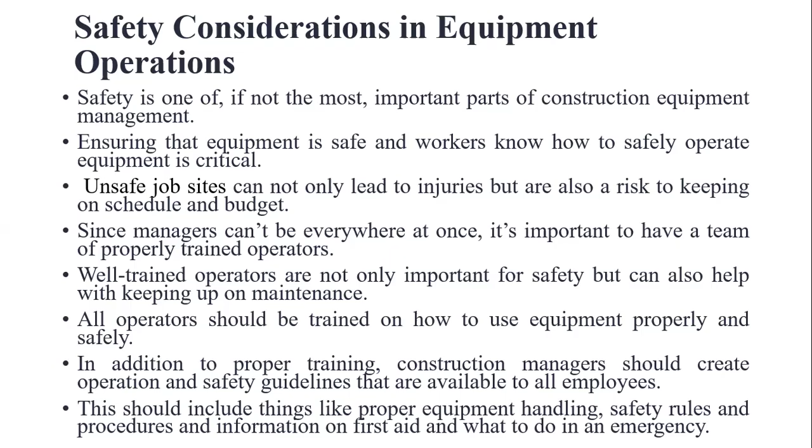So to avoid unwanted problems, it is essential to train the labor for a particular period of time. Nearly 20% of the workers in the construction sector are injured because of lack of proper knowledge, and these injuries are not reported to the higher level of management. Because if they give such explanation to the management, they'll decide that these people are not fit for the job, and for the next projects these people will not be called for, automatically leading to unemployability. So this is the reason why people do not report most of the accidents at the site to the higher or top level management.

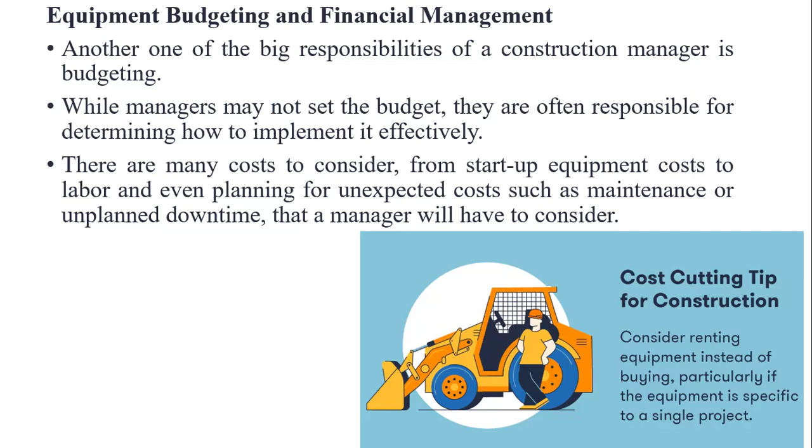Next comes equipment budgeting and financial management. Another important role of the project engineer is budgeting for machineries. They want low cost machines to do the operation so that the cost of construction will be in control. If the project engineer fails to do so, then he or she is not fit for the job and will be fired from the organization. So budgeting and financial management for equipment is quite important.

Next comes the types of cost involved in equipments. First one is acquisition cost. Most of the cost spent by the construction company is for buying machines so that the work will be automated with very low manpower. Based on the company of the machines, the cost will vary.

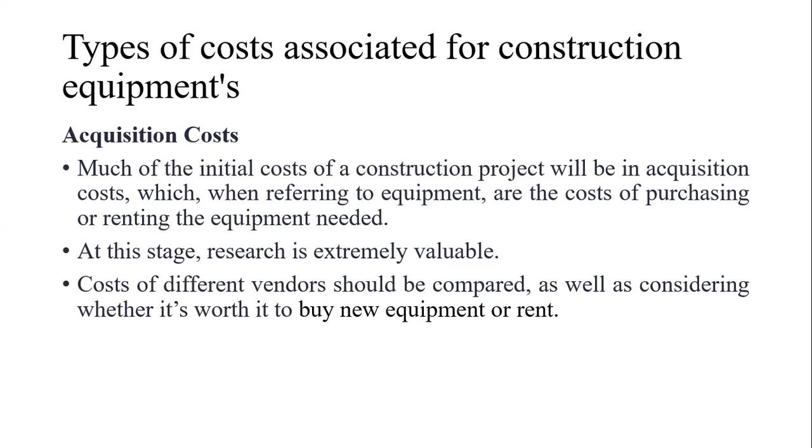There comes a difficult decision making situation - what type of machine has to be bought and from which company. So we have to compare the specifications of machines as well as the suppliers, and based on that, a decision has to be made. And next comes the operating cost.

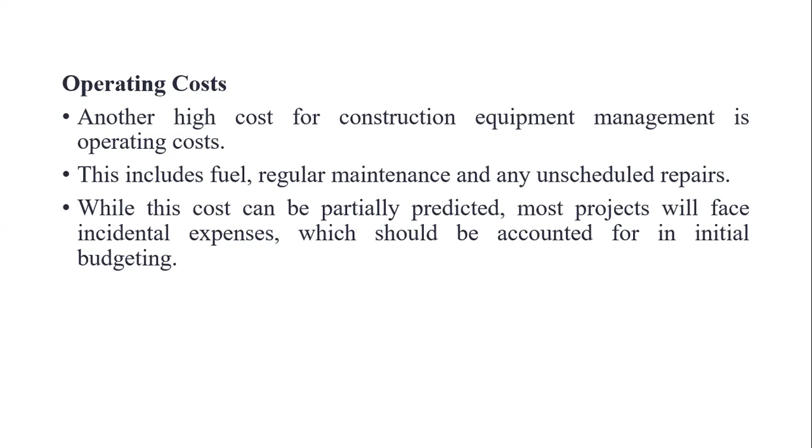Another important thing is operation cost. For example, for doing any activity, how much amount of money is involved, and how much amount of money is involved with other sources also, has to be compared. So based on the comparison, we may know how this machine is going to perform for the particular project, so that we can predict the cost for a particular activity for employing a particular machine.

Next comes depreciation. Depreciation represents, after a particular period of time - for example, after 10 to 15 years of buying any equipment and after its service period - what will be the cost if the equipment is sold at present. So how many percentage of money is reduced is said by the depreciation.

Next comes storage cost - the amount of money spent for building or creating storage area for a particular equipment matters here. If you're providing more money for creating storage area for storing the equipments, then it affects the overall finance of a particular organization. So we have to look at whether we are going to buy any machinery, and if we are going to buy any machinery, then we have to properly save the machinery for upcoming projects.

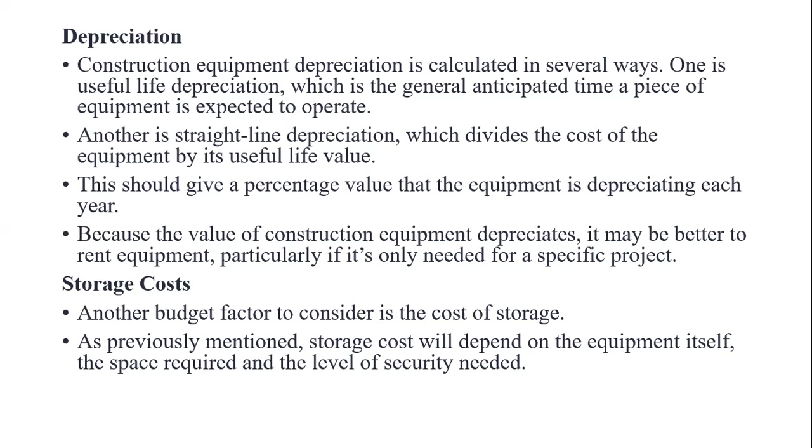And next comes the insurance.

If there is insurance, generally if there is any problem—for example, if an accident happens to somebody—and that person files an application with the insurance agency, then he has the eligibility to claim the amount from the agency. Similarly, in the case of machines, if you file insurance and something happens during its performance or operation, we can claim the amount from the insurance agency either for repairing work or for new machines, so that loss can be prevented.

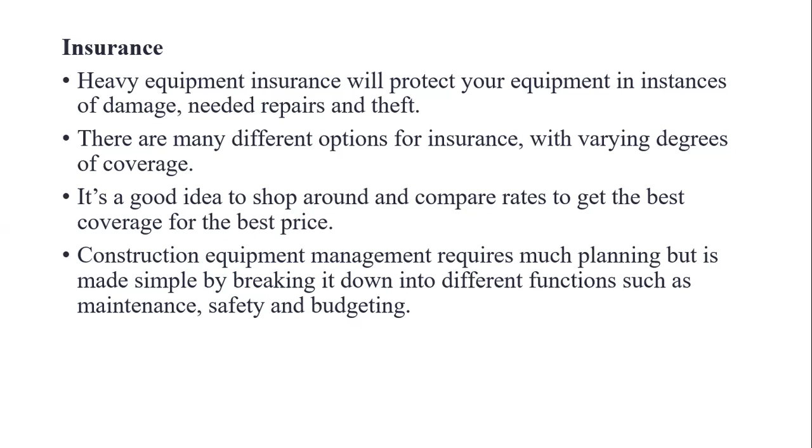Next, how to choose the right equipment based on the project need and requirement. For timely completion of projects, machineries can be chosen either for buying or on a rental basis. For that, we have some conditions.

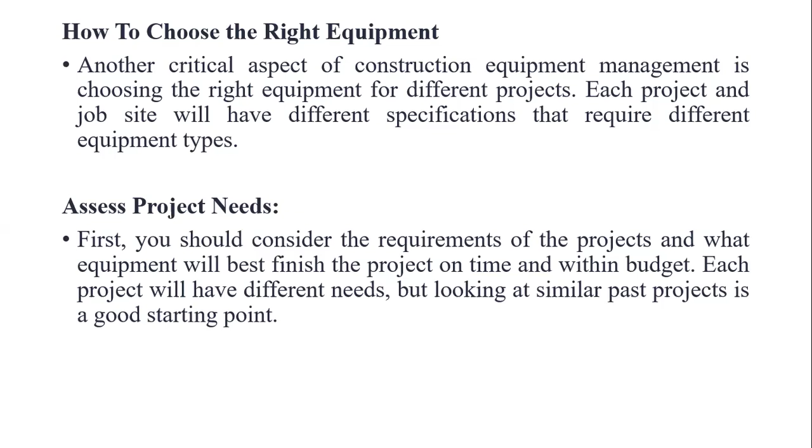The first condition is evaluation of your site condition. Based on the project need, we have to select the equipment, whether to buy or rent. Then, based on the site condition, we have to decide what kind of equipment to use.

For example, in hilly areas, you can't use big machineries because transportation of big machineries will be impossible in hilly terrains. So you can go for small scale machineries. If you're using small scale machineries, the days required will be higher, but at the same time you can save money and work continuously.

And next comes the budget, or cost. Cost is one of the most influencing parameters. Based on the project scale, the type of equipment has to be adapted. For example, if it's a small scale project, we have to choose small scale equipment so there will not be any loss. If you use large scale machineries for a small scale project, it will lead to an increase in the cost of construction activities.

Then comes the resource suppliers. We have to keep in mind that materials for constructing a building will not be supplied at a single stretch, but based on requirements. So based on the availability of material, the equipment has to be chosen. If no material is available on site and you've booked a machine, you are going to pay for the machine without using it.

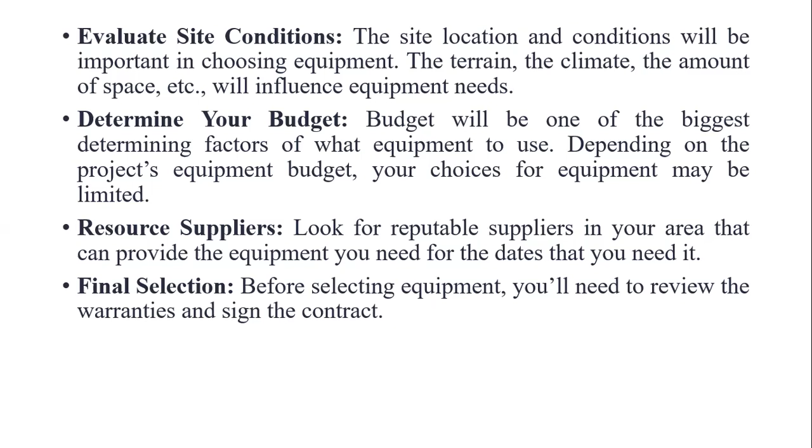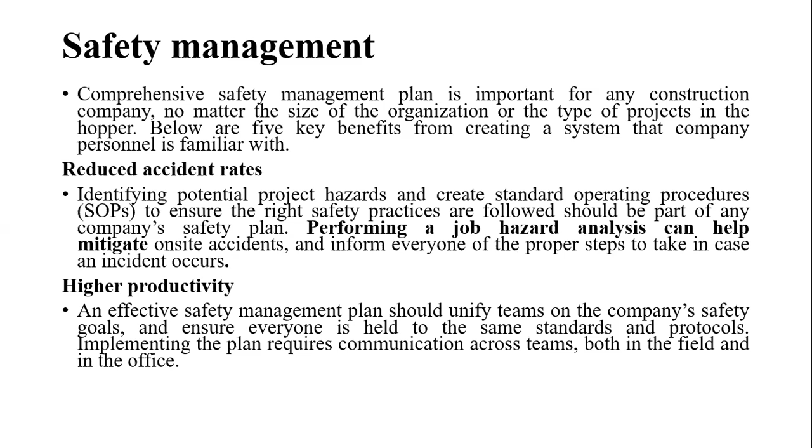So we have to be careful for that. And next comes safety management. As we've seen in the previous class, safety plays a major role, and this can be achieved by following safety protocols on site, so that we can avoid accidents. Meanwhile, we can increase productivity on the job site. We have to follow safety guidelines illustrated by various local as well as national governmental bodies.

By following the guidelines illustrated by government bodies, the safety for workers will be ensured. Then comes insurance again—for both machines and labors, the insurance can be claimed if there are any accidents and other related problems, so that the company will not get into trouble.

Then comes work satisfaction. Since construction work is tedious and one of the most complicated jobs, the workers have to be well trained before performing any tasks, so that they will have satisfaction regarding their work at the end of the day or at the end of the project. Okay, thank you.